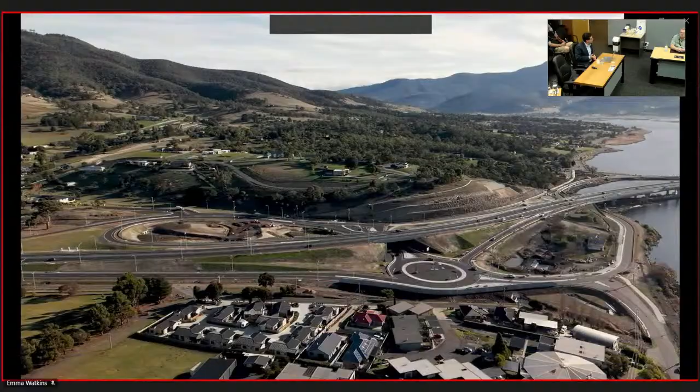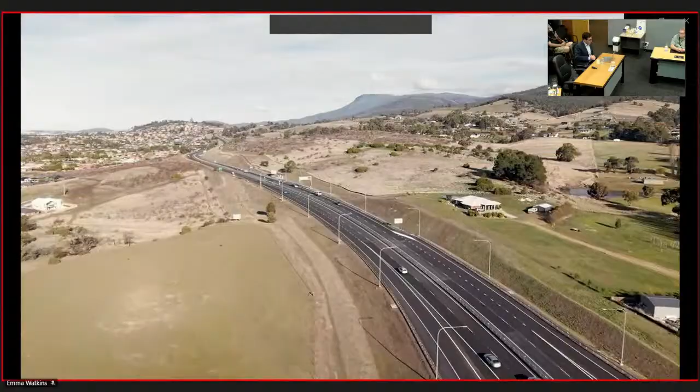So that's the equivalent length of a soccer field. So massive piles holding up our bridge.

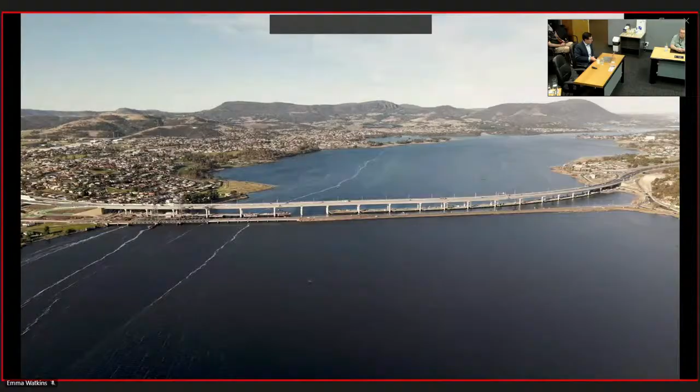The bridge itself has a posted speed limit of 80 kilometres per hour, primarily governed by the safe use of the on-ramps and the off-ramps at either end. The bridge has a 3 metre wide shared user path on the upstream side and safety barriers on both sides.

In terms of navigation, under the new bridge, the navigation clearance is 16.2 metres and a minimum 45 metres wide. That's consistent with the navigation channel underneath the Bowen Bridge, which is located downstream.

To achieve that navigation clearance, we will need to include the demolition of the existing bridge, the old 1940s steel frame lifting span bridge, which was actually the fourth bridge built in this crossing. So the new bridge is the fifth.

While we will be removing the majority of that 1940s steel bridge, we will be retaining the causeway. That was actually built by convicts between about 1810 and 1830, and that will remain in place.

This slide just touches on some of the stats in relation to our project. I mentioned the piles before and the piers - there were 46 marine piles and 42 piers. I'll touch on how we constructed the segments and the construction of the bridge later in the presentation.

In terms of status, hopefully you'll be aware we did open the bridge at the beginning of June. So far at this stage we're continuing to complete the finishing works, in particular the intersections at the end of the causeway and at the Bridgewater side. Shortly following that we will proceed through the demolition of the existing bridge.

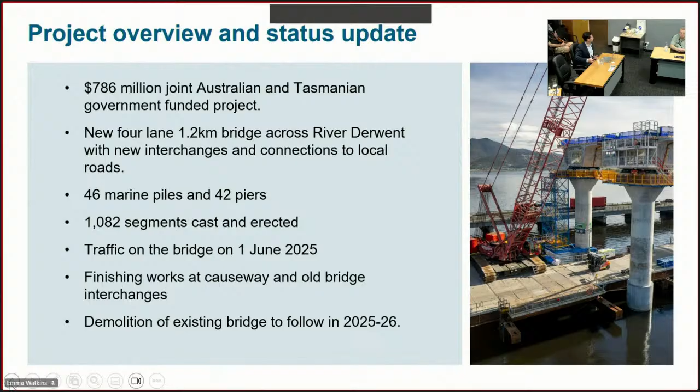So why was a new bridge needed? I think really to put it in simple terms, the existing bridge was the weak link in our Midland Highway. People would know that the state has been investing in the Midland Highway over the last more than 10 years now, undertaking significant upgrade works.

The old bridge was one lane in each direction, 60 kilometres an hour. In terms of freight, it was weight limited, it was size limited. It just wasn't meeting the future needs of Tasmania.

In addition to that, the unique aspect of the old bridge was its lifting span. The lifting span was becoming increasingly unreliable. It was incurring more significant maintenance over time and was likely to cost significant money to continue its operations, if they were able to be safely continued into the future.

So the combination of all that resulted in a business case to replace the bridge and, as I mentioned before, those intersections. We did do a range of cost-benefit analysis of the project, looking at only the aspects around freight improvements, efficiencies and direct benefits. We're able to demonstrate a rate of return based on a 5% discount rate.

If people have done business cases before, they'd appreciate that you can use a range of numbers in terms of the discount rate, which is effectively the value of money that you place on it. So we were able to break even at about 5%.

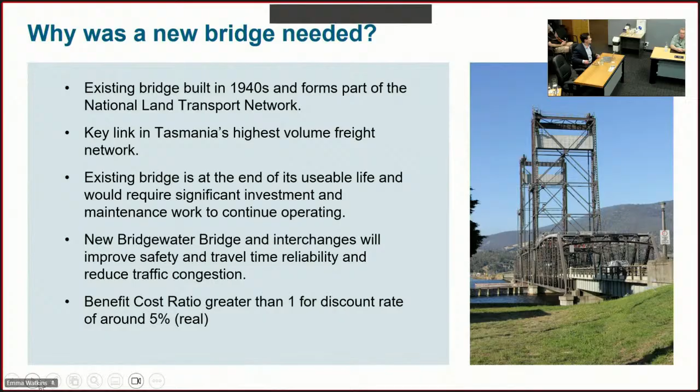In terms of the challenges that we faced, the reality is that we haven't built a bridge of this scale here in Tasmania for quite some time. If you think of the last really big bridge project here in Tasmania, it would have been the Bowen Bridge back in the 1980s. And we weren't likely to build a bridge of that scale again in the near future.

So that influenced partially how we actually approached the project in terms of how we structured our team, how we procured the project and the likes. Also the fact that we were aware right from the start that the site had quite complicated constraints that we needed to work to. For example, we have about 600 or 700 metres of mud flats that were too shallow to efficiently use floating plant, but too unstable to use land-based equipment.

And then we also had the navigation channel on the Bridgewater side, which was much deeper and again unsuitable for land-based equipment. So we had to work out a way of providing access across those different conditions. Also the actual ground conditions underneath where we're building the bridge, the geotechnical conditions, were such a mix of different rock types. It was like a fruitcake of different rocks all the way through from one side to the other.

So we needed a design solution that could be suitable in all of those different conditions. We also had to navigate quite complex planning approval processes. At the time the project was heading into its delivery phase, the state government was putting in place new major projects legislation. So at the time we were planning our project, it hadn't actually been drafted and it certainly hadn't passed government. So we needed to forecast the processes that we followed, timeframes and the likes, in the absence of actually having that planning process in place.

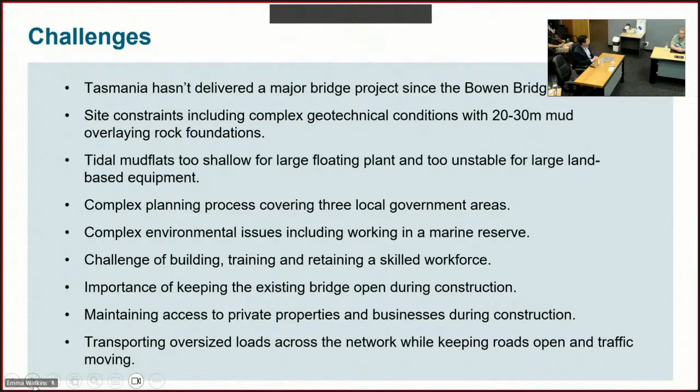So where are we now? Having faced all those challenges, we're basically at the tail end of a 6-year project. People talk about this project being around for many decades, and it certainly has been talked about for many decades. Really, I guess the project that I've been involved with kicked off at the end of 2019. My Deputy Project Director, Kevin Bourne, was the founding member, and he really started forming the team. I came on board about halfway through 2020.

By then, the team had already undertaken a range of geotechnical investigations, further development of concept designs and information such as that. So by the middle of 2020, there was a fair understanding of the nature of the project, and they were able to reach that point so quickly because of the 2 decades or so of previous work being undertaken by various parties. So that's more or less when we launched into preparing ourselves for the planning approval process and for our procurement processes.

Effectively, there was about 2.5 years of solid planning, procurement, and getting ourselves organised to deliver the project, and then that was followed by 3 years of successful construction, which brings us more or less to today, where we're now closing out the construction works and undertaking the project closeout.

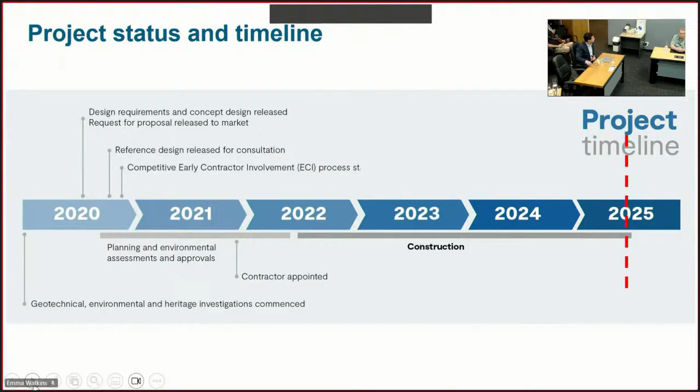In terms of the procurement, I mentioned before that was so important for our project. What we did was recognise that we were looking for effectively a strong collaboration with our successful contractor. So what we chose to do was basically put a request for proposal out to industry broadly, and then select 2 preferred tenderers to work with.

And we engaged each of those contractors that we selected, 2 of them, under an early contractor involvement contract, where we would reimburse them part of their costs for developing their proposals. And their proposals involved detailed tender designs. They included work method statements of how they would actually deliver the project, as well as their pricing of the project and ensuring that they provided us with competitive pricing.

And we're then able to compare the two tenders and select our preferred contractor from that. And that presented a whole range of benefits. We got to work with each of our two tenderers for an 8-month period.

We got to understand how each of them operated. We ensured that the designs they developed were fit for purpose and suitable and aligned with our needs. And as I mentioned before, by our contractors working through that so thoroughly, we were able to get competitive pricing that was sensible at the same time.

There's nothing worse than getting a low tender on a job because the tenderer stuffed up, because they didn't appreciate a particular risk. We were able to work through all the risks and make sure the parties understood them.

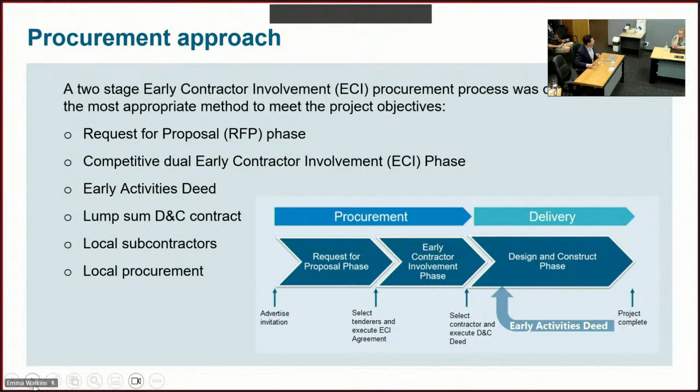That meant that in October we were able to commence construction, and I was astounded by how quickly the civil works commenced on both sides of the river as it started.

A key aspect from a timing perspective was the provision of access across the river. I mentioned before the temporary bridge that we built was so critical for minimising traffic disruption. It was so important for access.

That's where our contractor came up with the innovative idea of using 12 barges which were floated into place over the mudflats and settled on the mudflats to provide a stable platform, and then constructed a fixed bridge across the balance of it. That was built by local Tasmanian contractor, Bridge Pro.

They actually presented at a bridge conference just last week, and what they noted was - I'm just trying to remember - it was either the 5th or the 7th biggest bridge in Tasmania at the time, and that was the temporary bridge built in order to construct our bridge. So, 300 metres long.

At the moment we're in the process of removing that bridge. Again, it was built by a local contractor that really developed or increased their capacity to work in this environment through this project, working with our Tier 1 contractor.

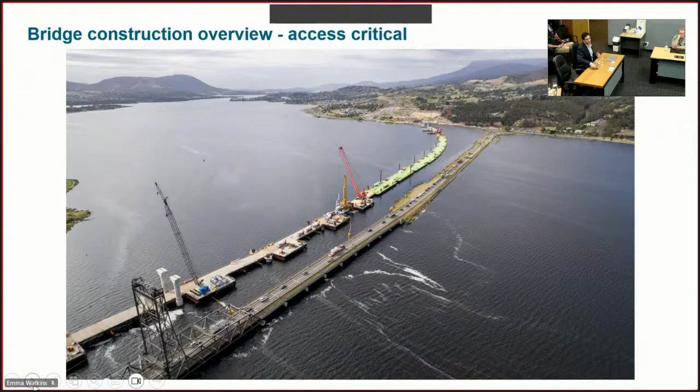Move on to us - I don't know if I'm going to be able to pause this throughout, Emma. Probably not, probably not. Okay, well, we'll run it through. I'll do my best to talk as it's running and touch on the key aspects.

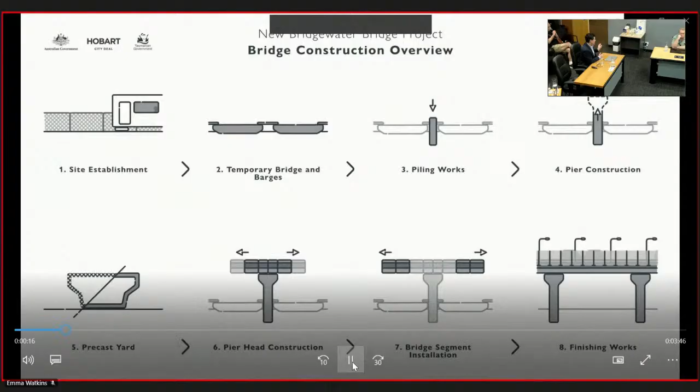This is an animation we put together to try and explain how we constructed the bridge. It's available on our website, so if anybody wants to take the time to look at it later, it's there. I'll try to talk to the pace of the video. Essentially the video goes through the key aspects of site establishment, the temporary bridge, piling works, pier construction, how we created the precast units, installed them as part of our deck, and then basically completed the works.

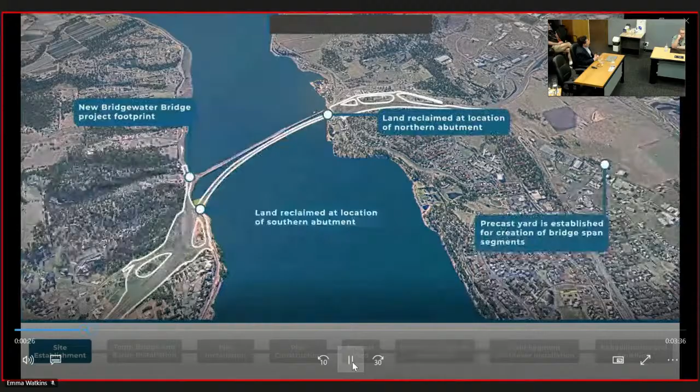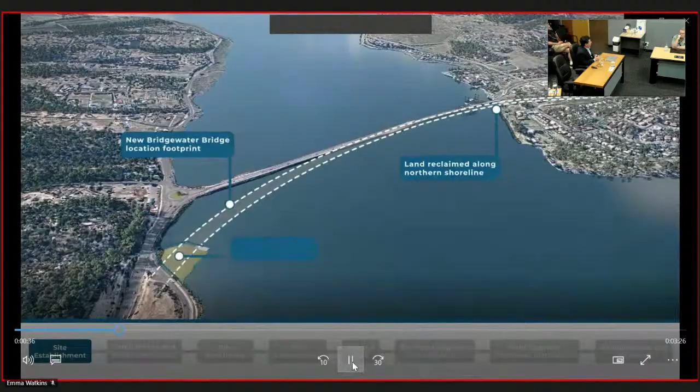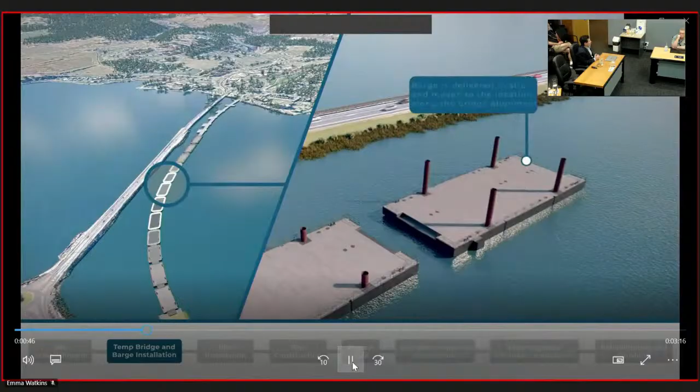The first aspect was getting access. We reclaimed land on the Glenorchy side, about 50 metres or so out into the foreshore, which will remain there permanently. That was to provide us with a point from which the pontoons or barges could be put in place. You can see each one was floated into place over the mudflats, filled with ballast water, and then fixed in place with bridges spanning between each one.

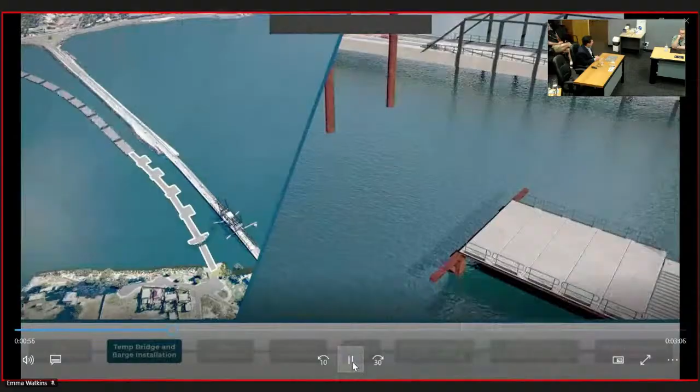We also constructed a fixed bridge with a steel frame and concrete decks, to cross the navigation span on the northern side. We needed one section of that to be equivalent height to the old bridge so that vessels could still go up and downstream if they could go under.

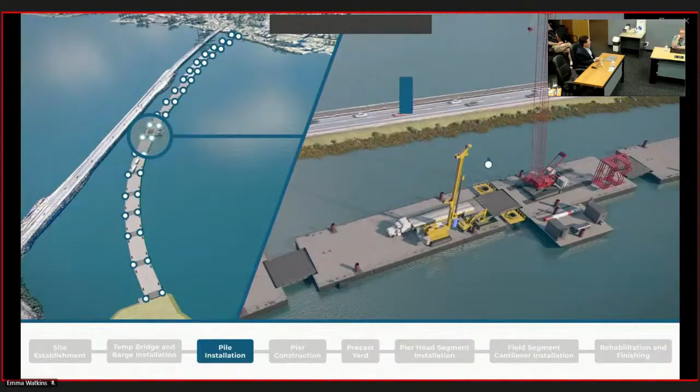Now this is where we start building the bridge itself. For the piles, we used steel casings which went from the top of the water, through the mud, down to rock. We then cleared the material out of that steel tube and took it off site, then proceeded to drill down to the necessary depth, place reinforcing steel, and fill it with concrete.

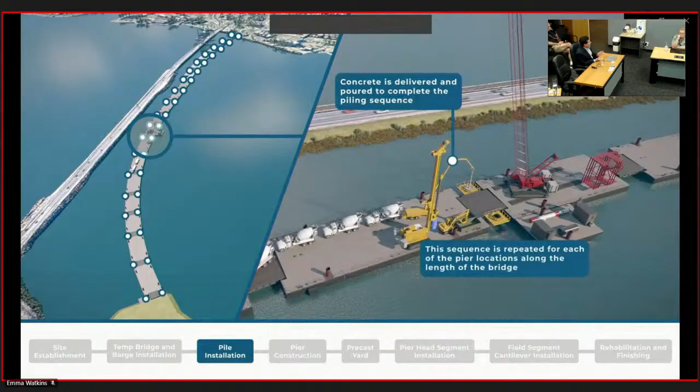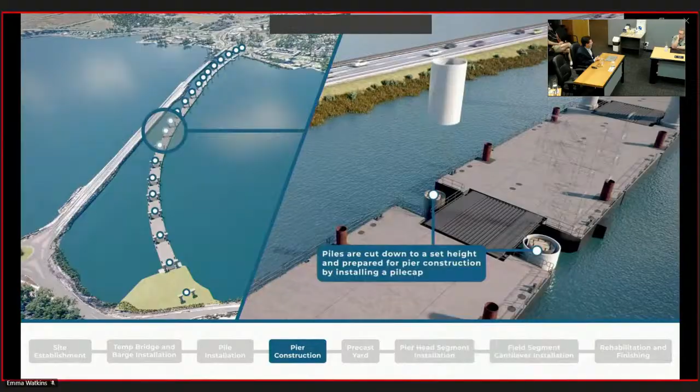So in terms of that, the actual steel casing that went in at first is actually sacrificial. It's really just formwork. It's the reinforcing steel and the concrete that make the strength of the pile. We then placed pile caps on top, and then the piers on top of that.

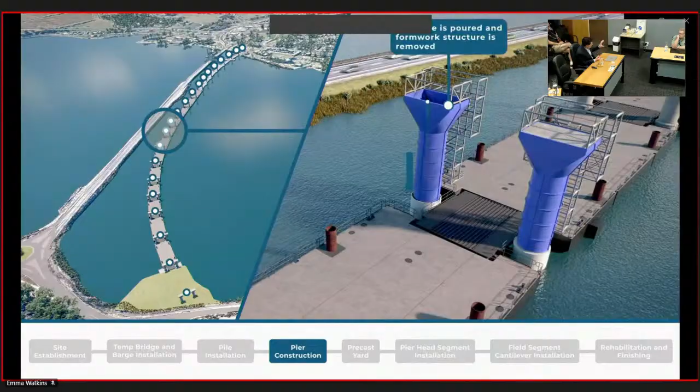The pile caps were prefabricated off-site. They were the white section that you can see in the image there, and the blue section is the formwork for the casting of our piers. Again, they were undertaken by Bridgepro, a Tasmanian company.

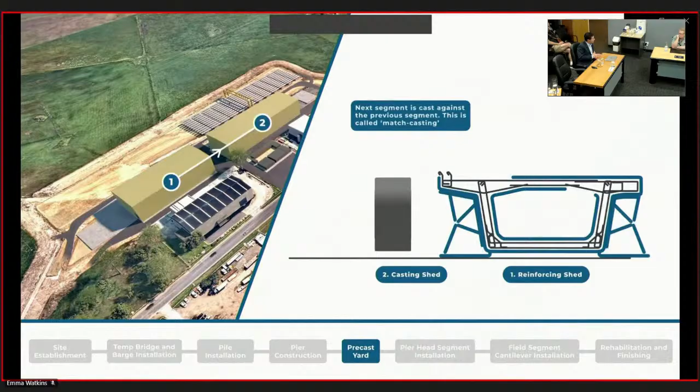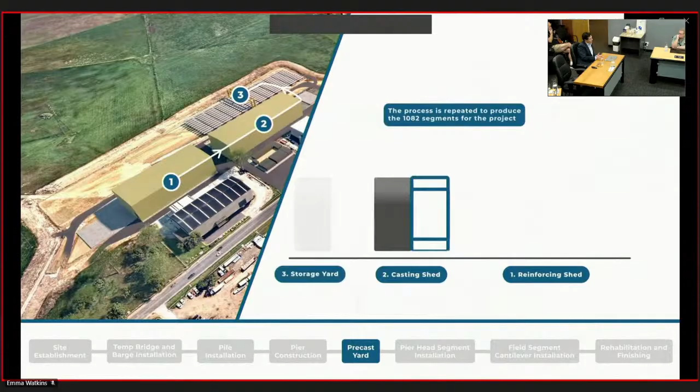The actual deck is made of precast units. 1,082 units were constructed, every single one unique because of slightly different design, and each one was match cast. Basically what it meant is we would pour one box section, push it out, and then pour the next one against it, so there was a perfect match between those two faces, and everything fitted together on site, a bit like a Lego set. All the pieces needed to match together.

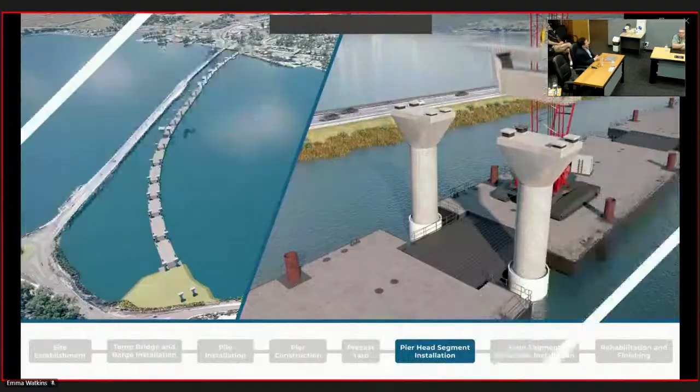They were then transported on site. The ones that go onto the pier stock were actually heavier than the others, probably typically about 80 to 90 tonnes for each of the pier segments. And then they're all pinned together.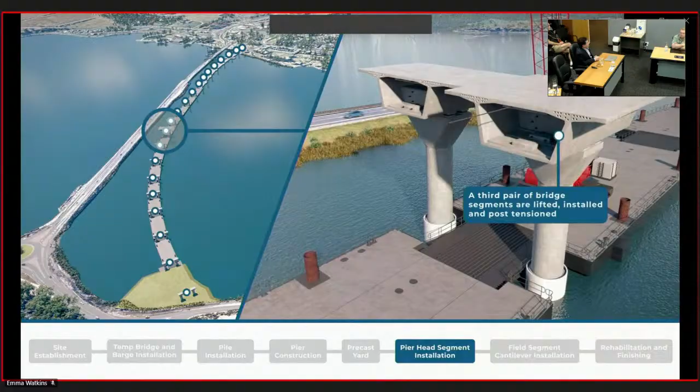From there, we were able to place what we call the field segments. They were around 60 tonnes each, and they were placed on either side and pulled back with tension to hold them in place. What we used were what they call special segment lifters, which isn't particularly exciting in terms of its definition or title. Essentially what we had is the equivalent of cranes sitting at either end, lifting up the pieces and putting them into place.

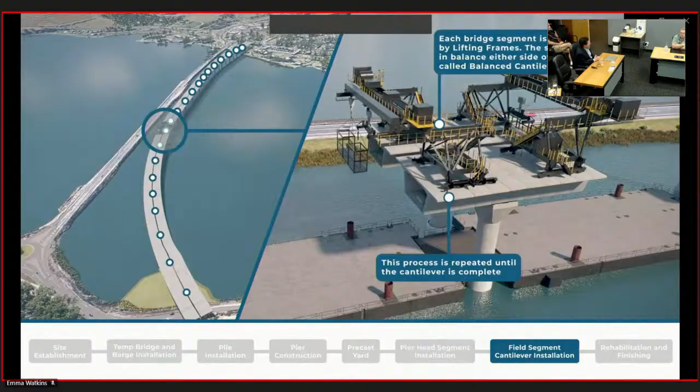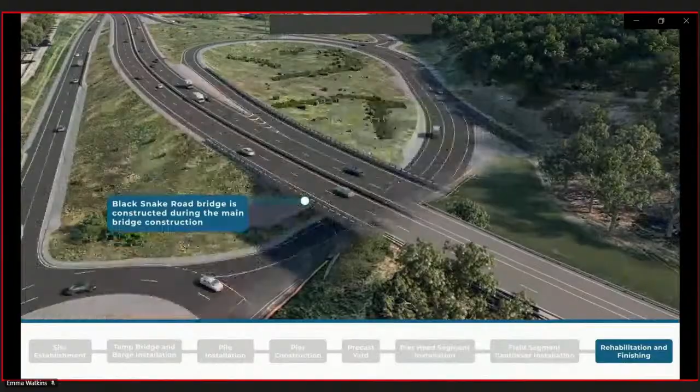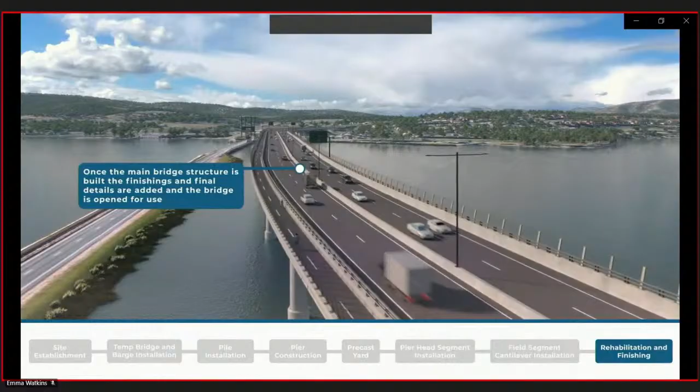We need to do it in a balanced way, so it was what we call a balanced cantilever approach - we're not putting too much weight on either side, so it was able to stay balanced each way. Concurrent with all of that were all the interchange works, other minor bridges and other works. As you'd appreciate, the structure is just one element of the bridge - we then needed to make it suitable and safe to drive upon, so there was a range of finishing works there.

With that video, because it's shown basically each thing happening at one moment in time, it looks relatively simple and straightforward - you just do this bit and then that bit. The reality is on site, we were doing everything at once. So we were still installing piles in the middle of the river - this photo's from the middle of last year.

While back from that, we were placing the pile caps on top of the completed piles, we were placing the piers on top of the completed pile caps, and in this image you can see on both images we're also placing the superstructure on top as well.

All of that work needed to be fed through that temporary bridge, so it was an absolute logistical nightmare for our contractor in terms of feeding materials and equipment to each of the different subcontractors engaged to do those works, and most particularly making sure it's done safely.

I think one of the key benefits from this project was that a large number of local contractors were involved in a project that really lifted the bar in terms of safety procedures and management processes. As you can see from the photo, particularly the one on the right hand side, how challenging it would have been throughout those works.

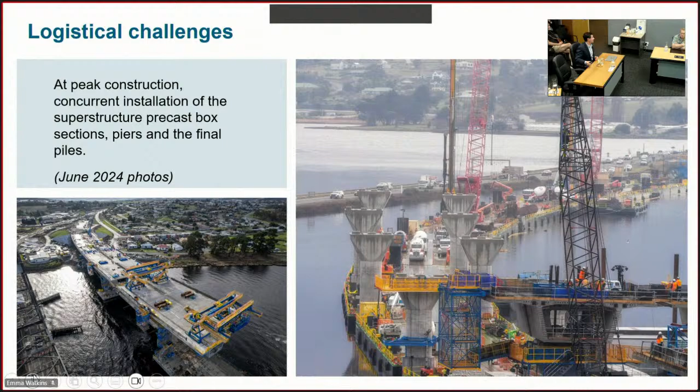In terms of the project, I think one of the real success stories was also our precast yard. I mentioned before we had to produce 1,082 concrete box sections. You can see there on the bottom right-hand side, when I think that was probably close to peak storage - I think we had about 400 or 500 of them stored there on site at that time.

Clearly, as they're being produced, we're trying to get them off and installed on site as quickly as possible. At that stage, I think we almost got into triple stacking them - we were targeting just keeping it at double stacking, but at one stage we were triple stacking some of them. In terms of that facility, it was actually a purpose-built facility leased from a developer here in Tasmania.

The real benefit of that is that at the end of the project, it remains as an asset here in Tasmania that can provide future opportunities for development. There was a precast yard adjacent to this one, and they've now expanded into the shed shown on the right-hand side. I believe that second shed has already been leased out to a Tasmanian business.

In the future these can be utilised for other things, such as the developer, David Mariner, has talked openly about aspirations to perhaps produce prefabricated homes through concrete or other means. When I was speaking with the construction manager a couple of weeks ago, he mentioned he's been on about five equivalent projects where they've set up precast yards, and in all of the previous projects they've knocked them down at the end. This is the first time he's actually seen the asset retained by the community or the state after the project. So that's a really good success story.

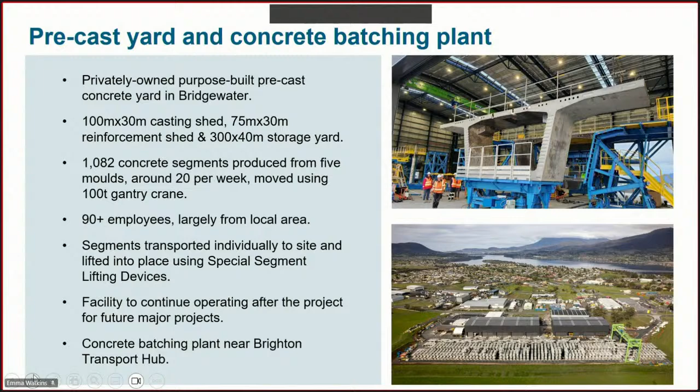So we did some really unique and complex work around measuring the stresses and strains the existing bridge would be under as these segments were transported across. It's important to note the actual load itself wasn't excessive - it was just the fact that we were doing so many of them that made the engineers nervous. We do oversize, overmass loads across the existing bridge from time to time, but this was something like 500 trips in relatively quick succession. A lot of work went into proving it would be safe and monitoring the condition of the bridge all the way through, so we could see it through to the end.

That brings us to the demolition of the existing bridge. As I mentioned, it's necessary for a range of reasons, including re-establishing good navigation upriver. Since the 1940s, or before, a range of bridges have been in that location with various swing spans and lifting spans to provide access upriver. Now that we've built the new Bridgewater Bridge at 16 metres, vessels of that height can, once we remove the existing bridge, move unimpeded up and down river.

That's quite important because we got to the point with the existing bridge where it was unsafe to raise it during strong winds, and we were unable to open it to its full height because of engineering concerns. So it meant that if somebody went upriver or downriver and the wind picked up, there was a possibility they wouldn't be able to return until conditions improved.

Removing the bridge is important from a maintenance point of view. The reality is it's an old steel structure in a marine environment. One of the unique features of our bridge is actually the welds. Back in the 1940s, the welding approach they used for the structure was relatively experimental. And that's quite interesting from an engineering and historic perspective, but it is also very challenging as an asset owner, as those welds become brittle and start to fail and we have to replace them.

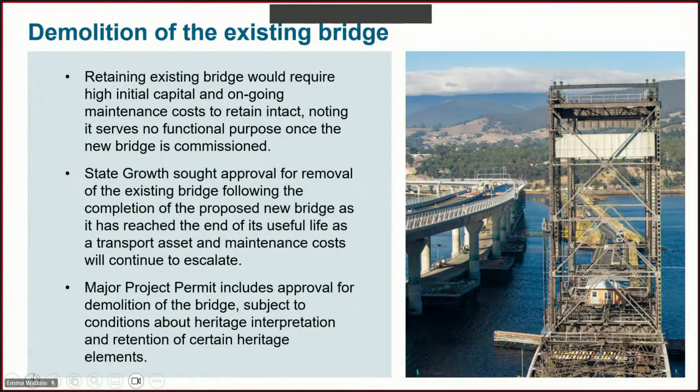In terms of those conditions, part of it is making sure we take representative samples of the existing bridge and incorporate those in artwork. We're in the process of selecting our preferred artists, and we're incorporating a number of those unique connections within the existing bridge, those joints, as part of artwork which will feature on the Bridgewater side.

We're also basically developing a heritage interpretation strategy that references a range of information about the history of that crossing. As I mentioned before, there have been 4 bridges constructed from the end of the causeway to the Bridgewater side over the life of the crossing, with our bridge being number 5. Put the temporary bridge in there as well, you could say number 6. So it's recognising the history of each of those projects and the history of the area more broadly, also its environmental history and Aboriginal history. We're working through each of those as part of our heritage interpretation strategy.

Other works we will be doing in addition to the heritage strategy: we are reinstating or building a new boat ramp on the Bridgewater side. Prior to our project there was a relatively old boat ramp on the Bridgewater side, which we needed to build our bridge over the alignment of. So we're reinstating and building a new boat ramp and jetty to contemporary standards at that location, and also undertaking a range of other foreshore rehabilitation works.

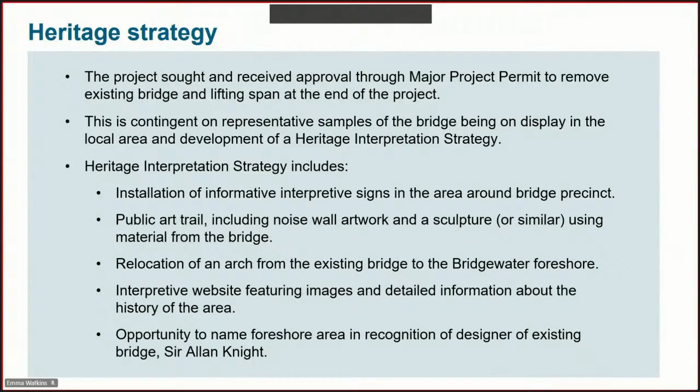Also, as part of the heritage interpretation strategy, we've approached the descendants of Sir Allan Knight to potentially rename or name a section of the foreshore in recognition of Sir Allan Knight as the designer of the 1940s bridge. You can tell from the history he was the equivalent of the Leonardo da Vinci of Tasmania back in the 1940s. He was involved in a lot of the hydro schemes as well as bridge schemes, including designing and doing work around the Tarraleah hydro scheme, which is about the same time as this—and coincidentally they're in the process of looking to replace and refurbish that as well, so the timing is consistent.

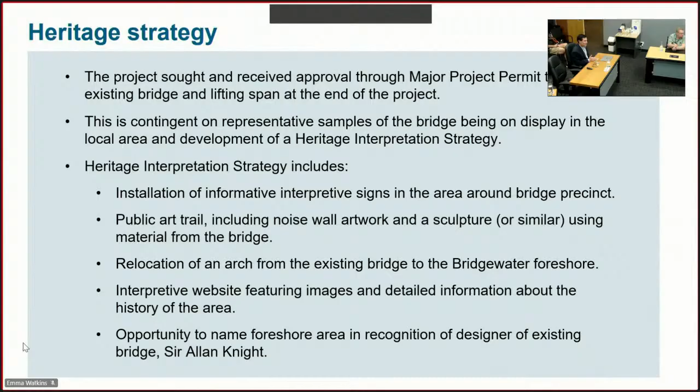A question I have, Ben - as part of the land requirement for construction of this bridge, you purchased the Black Snake Inn. So I'm wondering what the future holds for that once you remove your works depot located alongside it. You've mentioned remediation and historical value with the causeway, and there's quite a bit of considerable historical value with the Black Snake Inn. Are there any plans for that?

Yeah, it's a good question. It's a decision which ultimately has yet to be made through government, but if I was forecasting, the general thoughts at the moment are that the intention is to put that back into the private sector - basically put it on the market, the Black Snake Inn itself.

In terms of the Black Snake Inn, we recognised it was quite important to have flexibility in how we worked and delivered our project around that property. There wasn't justification to compulsorily acquire all of the property, but we needed some of the land. So we ended up reaching a voluntary agreement with the landowner. We purchased it through a voluntary purchase, with the understanding that at the end of the project there would be surplus land and property remaining, which is the Black Snake Inn itself.

Through the course of the project, we've identified an area that we are using to recognise the Aboriginal history of the area. So the section more to the north, closer to the southern abutment of the bridge, we're in the process of finalising the design of a small parkland area there, which will recognise the Aboriginal history of the area. A portion of the land we've had to utilise for water sensitive urban design - so when water comes off our road, it goes through a range of ponds or settlement areas to try and take out as much rubbish as possible before it ends up in the river. So a portion of land has been used for that.